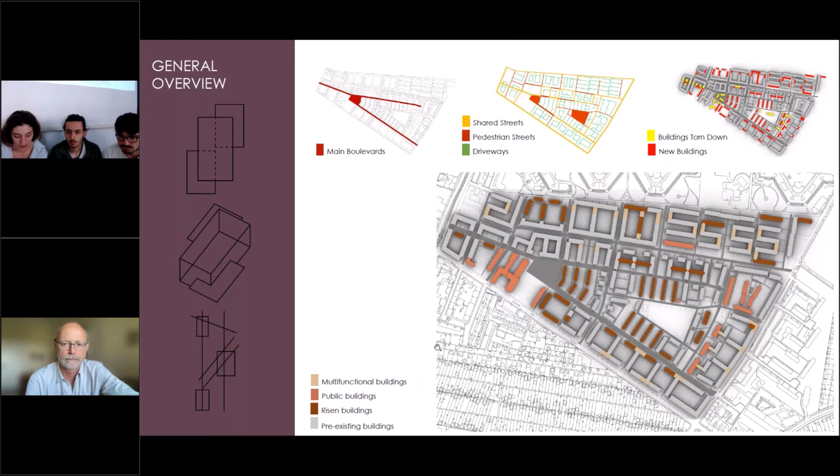We focused on a meaningful sector where we can distinguish two different types of intervention on two different typologies of building.

At this scale, the role of the carpets is more appreciable, having the role of connecting buildings between them, like in the right part of the sector, or connecting the building to the house.

Then the space between existing buildings we saturated with multifunctional buildings. They normally have a public function to increase the relationship between citizens.

These volumes are repeated in many ways, so we decided to use an open plan structure responding to a need for flexibility and adaptability.

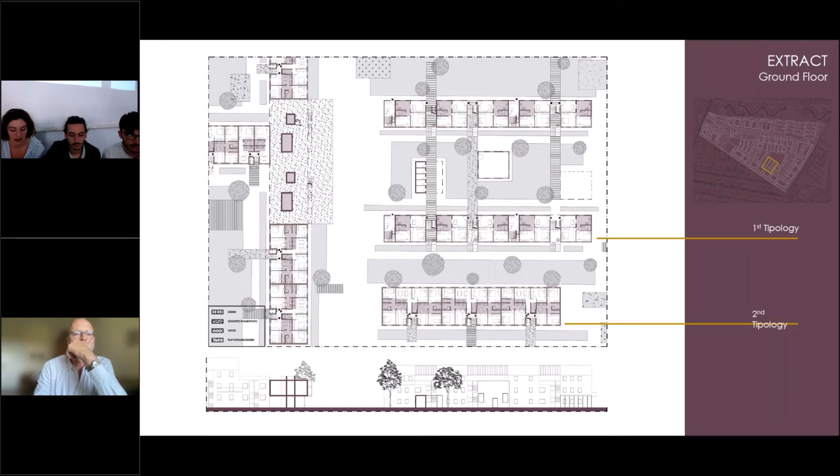We have used a constant, these blocks that are structural, used also as services for an elevator or services like the bathroom in the public spaces.

Here, an isometric view where we associate the project references to the solutions we have.

From the Furla factory and the project in Toulouse, we took the idea of the terraces upon the building for the population, where they can meet and stay with each other.

We'd like to express the lightness of the structure. From the FunePark in Amsterdam, we took the idea of the carpets, the different material treatment of the streets and the carpets.

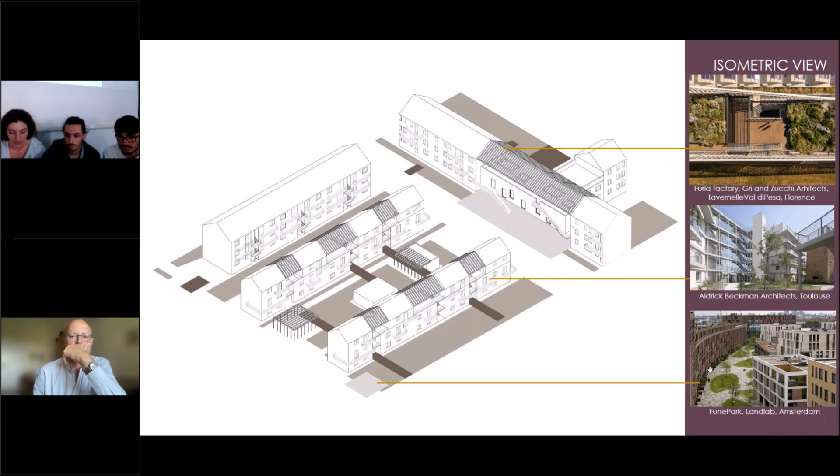Then we talk about the intervention on the typology. We started from the current state, and we applied some service blocks, trying to maintain the rhythm of the current state.

Inserting the stairwells to go to the upper floors.

There are two different typologies of apartment: the pre-existing, where we connected the old apartment, and a new typology developed on two floors.

When we go to the second floor, we decided to reduce the number of apartments to create these terraces that are public, not private.

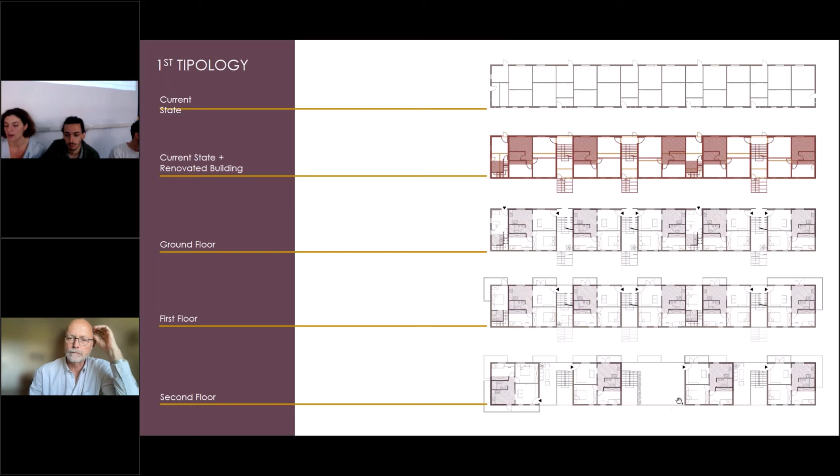This is a focus on the apartment, and that's an example of a service block.

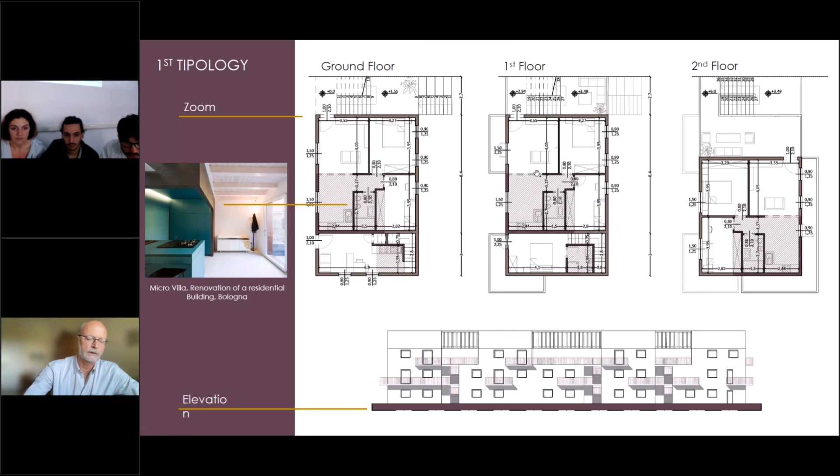This is the other typology, where we decided to take out the stairs to increase the space, which we divided into 3 different apartments, using the same service blocks we saw before.